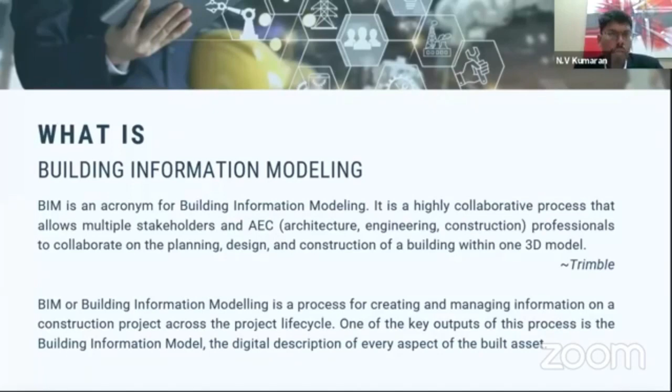Number two, BIM or Building Information Modeling is a process for creating and managing information on a construction project across the project lifecycle. One of the key outputs of this process is the building information model itself, which is a digital representation of the built asset, specifically for design, construction, collaboration, and also asset or facility management. So you're able to use BIM.

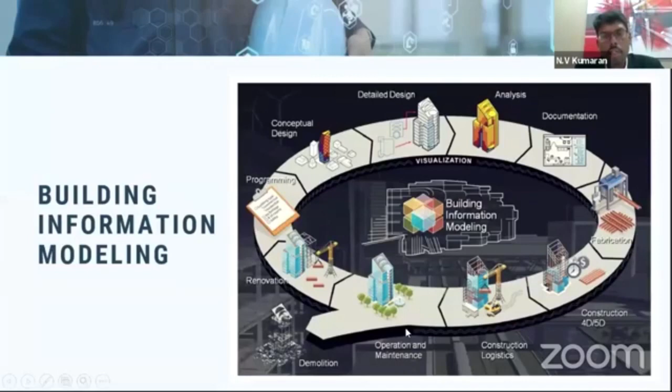If you look at the overall project lifecycle, you are able to use BIM at various stages. Starting from conceptual design, then detailed design, moving across to enable more analysis, then coming to documentation, then for the fabrication team, moving towards construction as in 4D or 5D, then construction logistics in terms of site planning and logistic planning. Then finally you come into operation and maintenance, and of course BIM can also be used for renovations. So this is the overall BIM process in the project development lifecycle.

So if you look at the BIM process overall, at a high level it's plan, design, build, and manage. Within the benefits of the process, you can look at 3D visuals before concept and construction. You're also looking at customization, flexibility, and design options - rather than looking at drawings and sketches, you are looking at 3D models.

Then you move into coordination and collaboration, communicating with multiple stakeholders and decision makers on how this development can take place. Then you also identify conflict detection and risk mitigation. Conflict detection is where clash analysis comes into play - you're able to identify any rework possible later, during the design stage itself, before even breaking ground. Risk mitigation in terms of utilities, underground services, and weather risk can be anticipated using this 3D model.

Moving further, it improves performance with less rework, moving to productivity and cost optimization. Overall, you can reduce 20 to 30% of wastage because you're able to plan and anticipate before you execute. Most of the time the plan is executed without proper coordination or collaboration of information. Finally, you can see easier maintenance for the entire building lifecycle.

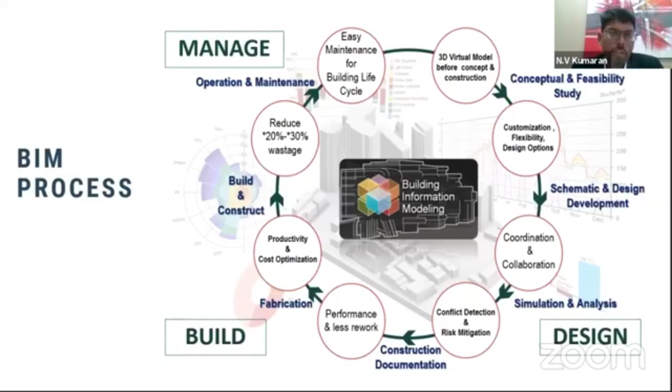Then you're able to build and construct on site using the 3D BIM model, and with the same integration, bring it over to operation and maintenance. The same single model used for conceptual design, detailed design, construction, and fabrication, is now finally used for operation and maintenance based on the as-built model. So this is the overall BIM process.

Before moving further, we also need to understand the adoption rate within Malaysia itself - where we are as of BIM. This statistical information is provided by CIDB based on 2016 adoption data. If you look at the central region, it's about 78% adoption. Northern region is about 2%, East Coast region 6%, southern region 8%, and Sabah and Sarawak about 6%. This percentage has moved further because the majority of projects, specifically government-related projects, have included an obligation that the main contractor or project management consultant must adopt BIM.

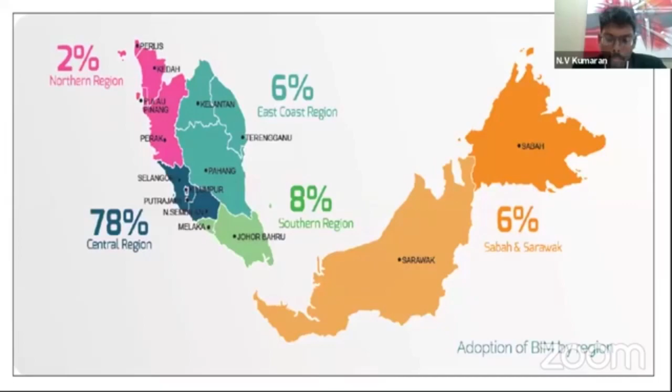So first is design. Most users will be coming from the design participants or design usage. At design, you are doing visualizations, which help make faster decisions for design intent and project execution, because you're able to look at what will be constructed at the design stage itself. This is not only used by the architect - it will be used by all stakeholders, including structural engineers, M&E engineers, main contractors, and even quantity surveyors or QS consultants.

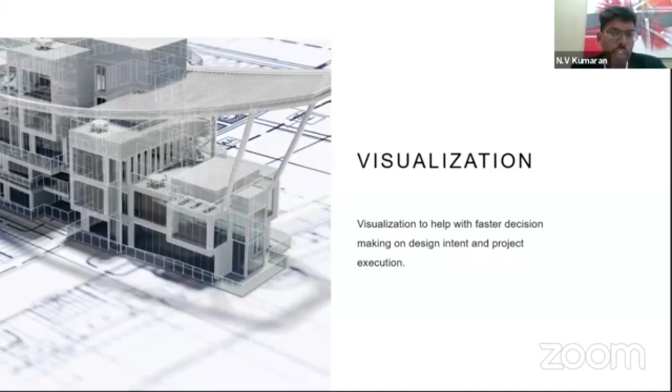Second benefit of using BIM is conceptualization. You're able to explore more possibilities in less time and efficiently create and manage complex geometry. Previously, only architects had high-level information or creativity through 3D models, like SketchUp. But now, using BIM as a process, your conceptualization carries information, so you can look at different possibilities in terms of shape, design, and quantity, including GFA calculation.

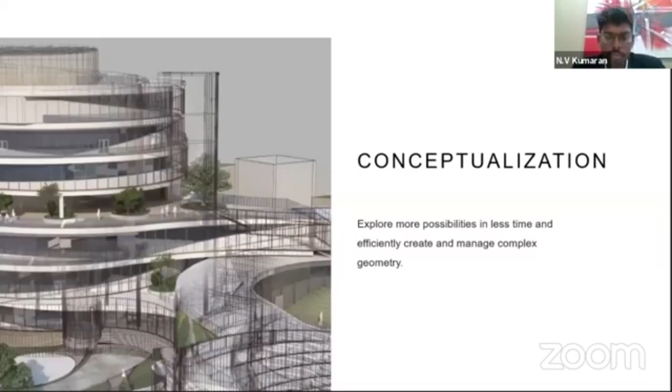Then of course you're looking at clash-free design. Most of the time people say let the contractor struggle with this on site. But if you make a clash-free design, you save a lot of time in clash resolution or variation orders, which would otherwise increase time and cost during construction. You're able to manage and coordinate the process fully from design all the way to construction. This clash-free design happens at two stages: during design and during construction, through design coordination meetings and construction coordination meetings.

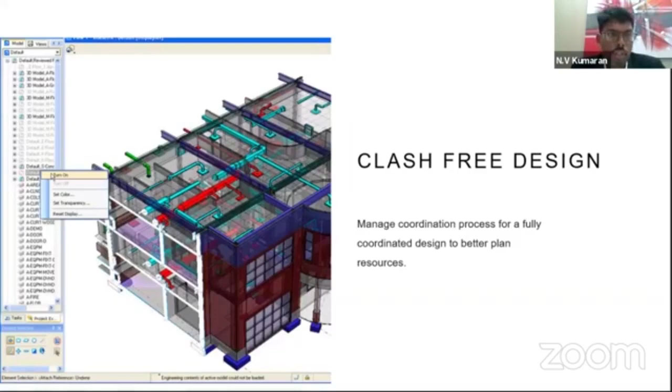That's design. Moving next is procurement. During procurement, people ask, do we need BIM? Yes. You're able to use BIM for work packaging, which aligns the design and contracting strategy. You can visualize whether to have one contract for the entire building or infrastructure project, or split it into work packages. For example, in MRT Line 2, multiple contractors were assigned by different chainages - some for stations, some for viaducts. For a building, contractors can be awarded substructure or superstructure work. This work packaging is decided based on a BIM model, giving full visibility to all stakeholders to execute the contracting strategy.

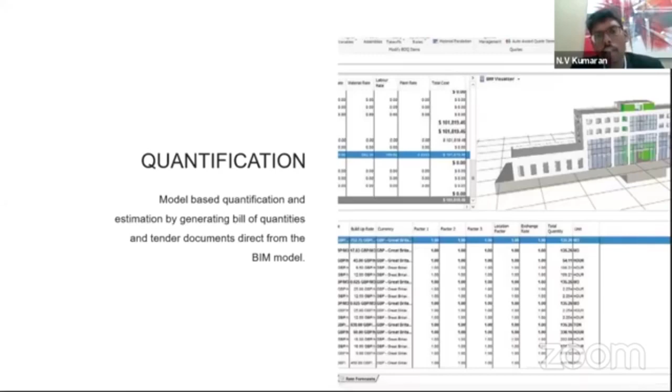Further is quantification. Most of the time when I show this, the QS thinks their job is at stake. Actually, no. As quantification or quantity takeoff comes in, the BIM model can produce quantity, but QS consultants are still needed to put up rates and optimize quantity or cost. This is model-based quantification, and the estimation is generated from the bill of quantities, which you bring over to the tender documents for the tender execution process. It's interrelated - any changes to the model automatically reflect into the quantity and the BQ.

Then of course, contractor evaluation. By having BIM in the process, you can evaluate whether the contractor completely understands BIM, not just the 3D model but the method of construction. Most of the time contractors say they can complete in 12 or 14 months, but how? They just copy and paste the method statement. Now, by looking at a 3D model, they need to incorporate their schedule with the method statement, giving an idea of how the execution takes place in terms of logistics, transportation, and method of construction. This gives full visibility.

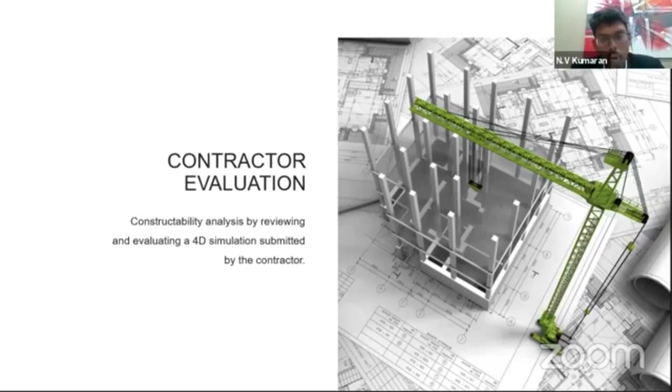There's also a session where you'll get full knowledge about 4D simulation, I think one of the days in this week.

You're also able to anticipate risk by having a BIM model, because you can look at real world conditions and site-specific environments. When you look at an infrastructure or building project, the footprint or alignment can be superimposed against Google information or land spatial information, so you can see existing structures or utilities and how these can be benefited. That's on anticipated risk.

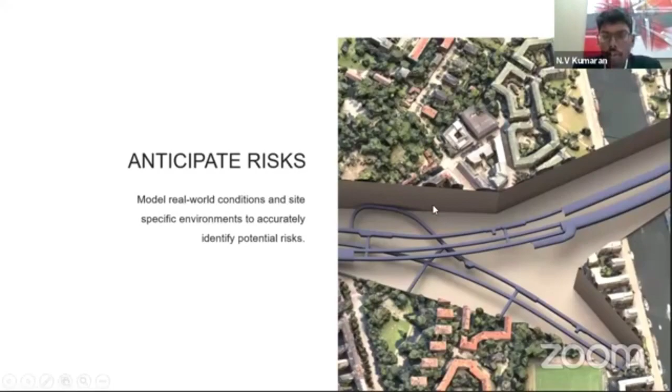Now moving to construction, in the project lifecycle you're looking at planning. Main contractors or turnkey contractors have to look at how construction should take place, how the design comes in, and how they're going to complete within 12 or 14 months. Based on that information, the model is integrated with the schedule, so you can see how day one, week one, or month one will be planned and executed. Combining the 3D model with the schedule represents the fourth dimension - time.

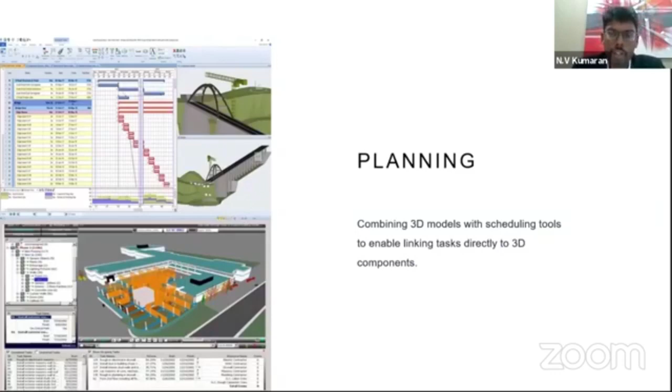Progress report - yes. To take this further, people use drones to pick up actual progress monitoring on site, and scanners to compare plan versus actual. You're able to compare what was planned versus what was actually executed on site, rather than using photos and compilations for progress reports. You can do that using drones and BIM models now, and request for information.